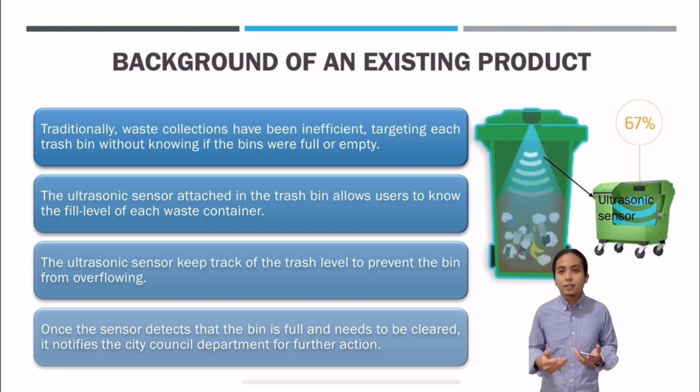First point: traditionally, as we know, collecting trash has been inefficient because we don't know if the trash is full or empty.

Second point is, as you can see from the picture, the ultrasonic sensor attached inside the bin is to allow the user to detect the fill level of the waste container.

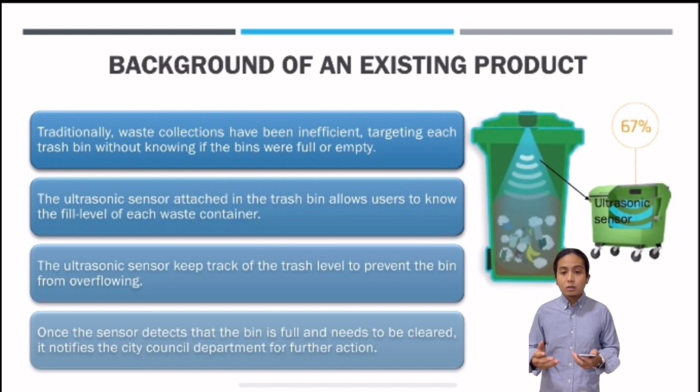Third point is, the ultrasonic sensor is used to keep track of the trash inside the container before it is full or overflowing. The last one is, when the ultrasonic sensor detects if the trash is full or before it's overflowing, it will notify the city council or alert them that the trash needs to be cleared or for further action.

Moving on to the next slide, problem statement of an existing product. Point number one is low quality of the air.

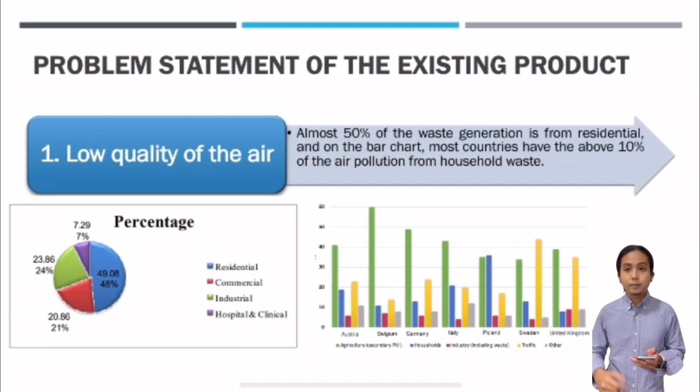Second point for the problem statement is absence of an indicator for hazardous waste. Hazardous household waste, which includes corrosive waste, toxic waste, flammable waste, and reactive waste, are commonly disposed of in the regular trash bin, which harms the community and the environment if left untreated.

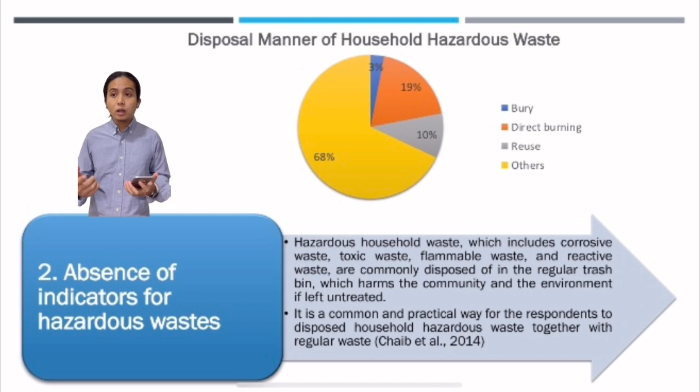It is the norm for people to throw different types of waste inside one container, and it is very dangerous. My name is Ahmad Zahid bin Muhammad Zahid.

The reason why the product needs to be innovated is because the issues of this smart trash bin will impact not only the community but also the country.

The existing smart trash bin needs to be innovated because the low quality of air spread leads to environmental damage, and it can also harm people's health.

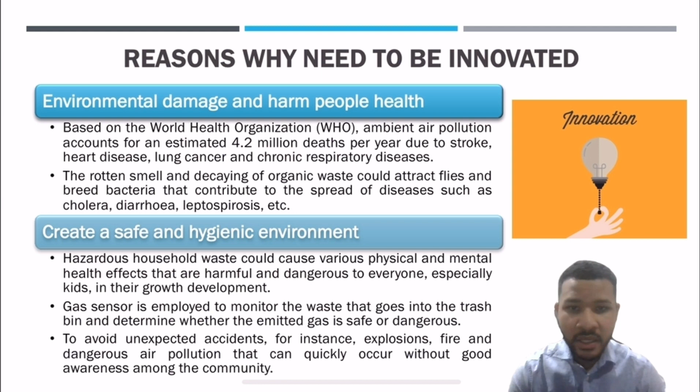Based on the World Health Organization (WHO), ambient air pollution accounts for an estimated 4.2 million deaths per year due to stroke, heart disease, lung cancer, and chronic respiratory disease.

The rotten smell and decaying of organic waste could attract flies and breed bacteria that contribute to the spread of diseases such as cholera, diarrhea, and leptospirosis.

The second reason is to create a safe and hygienic environment in the community, especially for kids ranging from newborn to 12 years old, by monitoring every waste that goes into the waste bin implemented with a gas sensor.

In the long term, hazardous household waste could cause various physical and mental health effects that are harmful and dangerous to everyone, especially kids in their growth development.

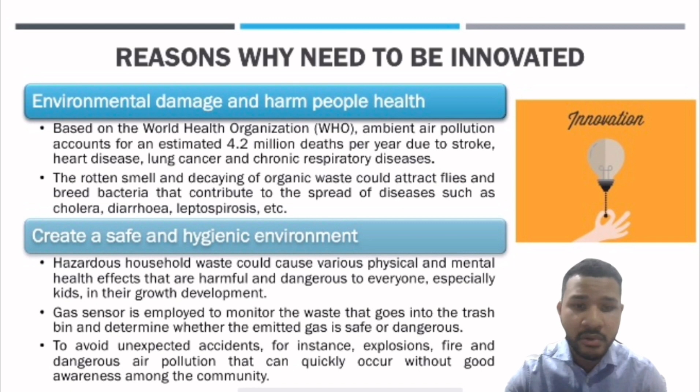On the other hand, the product needs to be innovated to avoid unexpected accidents, for instance explosions, fire, and dangerous air pollution that can quickly occur without good awareness among the community.

My name is Muhammad Shahrizal bin Iskandar. For our project, the type of innovation is modular innovation, which is a slight customization of an existing product.

This is because the existing product does not have much to upgrade. For our project, we add a gas sensor and ultrasonic sensor to improve the existing product.

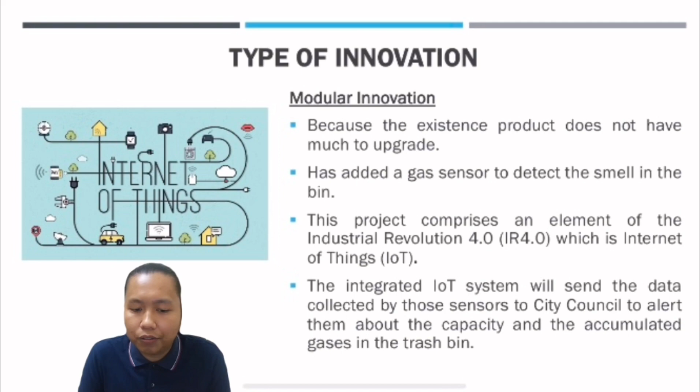Our product implements Industrial Revolution 4.0 elements, which is IoT. The integrated IoT system in the product will send data collected by the sensor to the City Council, alerting them of the operational status of the trash bin. The category of product for our project is improvement.

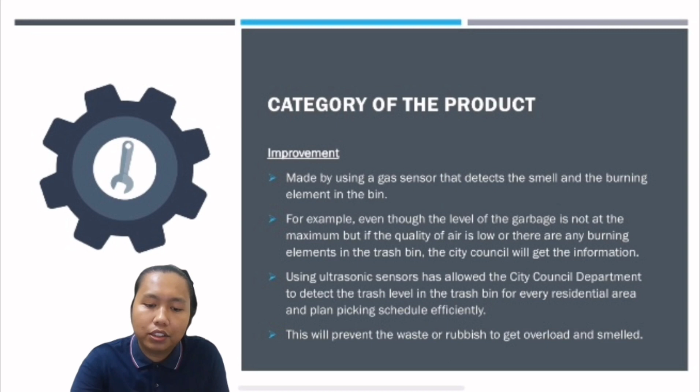Okay, the improvement that we made on the existing product is adding a gas sensor that can detect smell and burning element in the bin, and an ultrasonic sensor that can detect the level of trash in the bin. This collected data can be used to plan a pickup schedule for the trash bin. By adding these two sensors, it will prevent waste or rubbish from being overloaded and smelly.

This is the design for this smart trash bin monitoring system. There are 5 components used for this product: the first is ultrasonic sensor, the second is gas sensor, third is controller box, the fourth is DC motor, and the last is LED indicator.

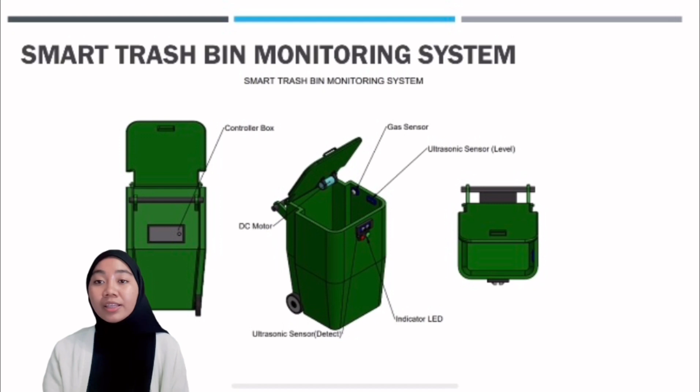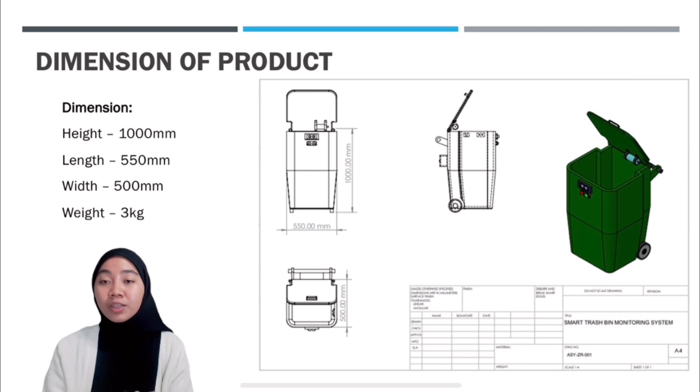These figures show the dimensions of the product. The height of the dustbin is 1000mm, the length is 550mm, the width is 500mm, and the weight of this dustbin is 3kg.

Moving on, I will continue with the aspects of the product. The first aspect is usability. The purpose of our product is to create a hygienic and hazard-free trash bin for users, which can be monitored from the control room of the City Municipal Department for smooth and efficient trash collection scheduling. This product is beneficial for both users and customers.

The next aspect is functionality. The controller in the bin is programmed using Arduino IDE, while the electronic circuit is designed and simulated using Proteus. The data collected by the sensors will be sent to an MQTT broker using Python IDE, and from there the data is received and visualized in Node-RED with the application of a dashboard.

There are a variety of types of data visualization, for example pie chart, table, bar graph, line graph, and many more. All the data from devices and sensors will be stored in a database for future purposes, and in this case we employ a software called DBeaver.

The next aspect is originality. We've added 2 new features, which are the gas sensor and motor. The gas sensor is used to monitor air quality and also detect hazardous gases, while the motor is used to automatically open the lid when the ultrasonic sensor detects the presence of people.

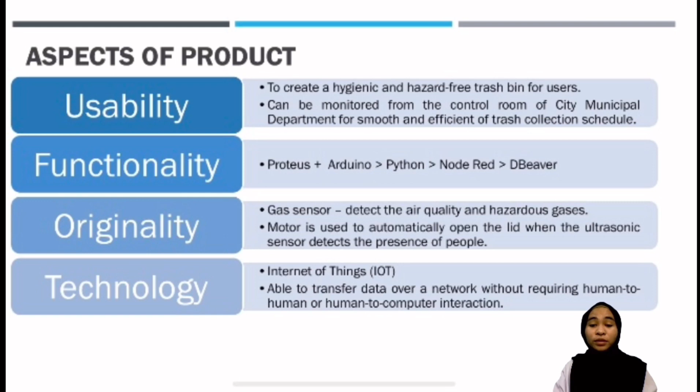And the last aspect is technology. We have employed one of the Industrial Revolution 4.0 pillars, which is the Internet of Things, called IoT. This enables us to transfer data to a network without requiring human-to-human or human-to-computer interaction.

Moving on to the dashboard. For the dashboard, we use 3 different types of data visualization: table, gauge, and also line graph. The staff of the City Municipal Department can easily monitor the level of trash in the bin, and also monitor any abnormalities in the gas level for detection of hazardous gases and air quality.

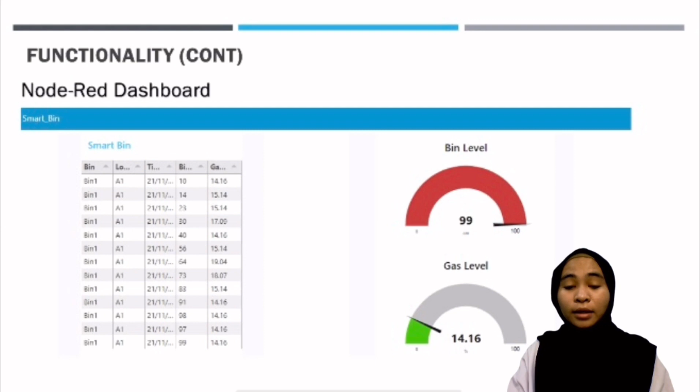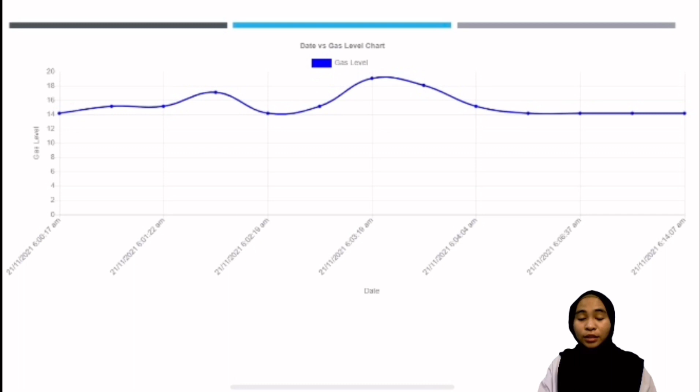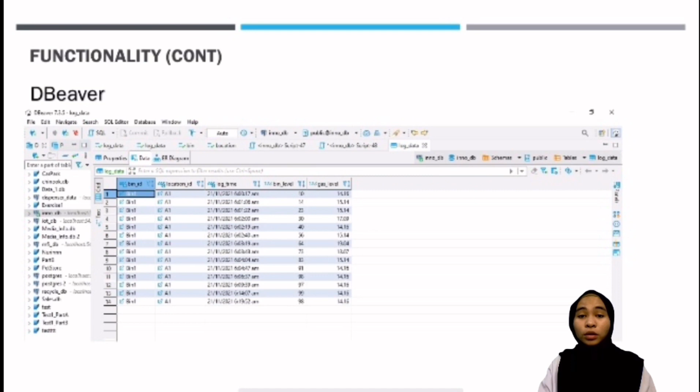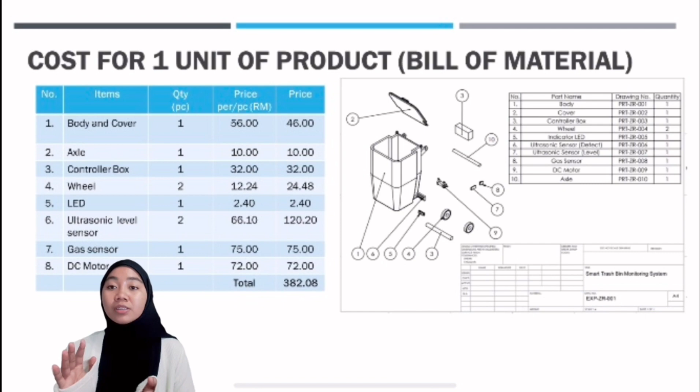The total cost for one smart trash bin is RM 382 and 8 cents. All the materials used in this smart trash bin are shown in the table below. So this is the video for simulation of the model.

My name is Mohammed Haris bin Ahmad Radim. Today I will explain to you about the target market for our company. This is industry under City Council in Malaysia.

Starting with Melaka. The company size is large because the City Council will cover all the areas where they apply the smart trash bin. The location is in Melaka. For operating characteristics, the technology scope, our company implements IR 4.0 with Internet of Things (IoT), where the data collected from the trash bin will be sent to the host computer or person in charge in real time.

And centralized monitoring using data visualization techniques such as pivot table, line graph, etc. Next, the benefits of the product.

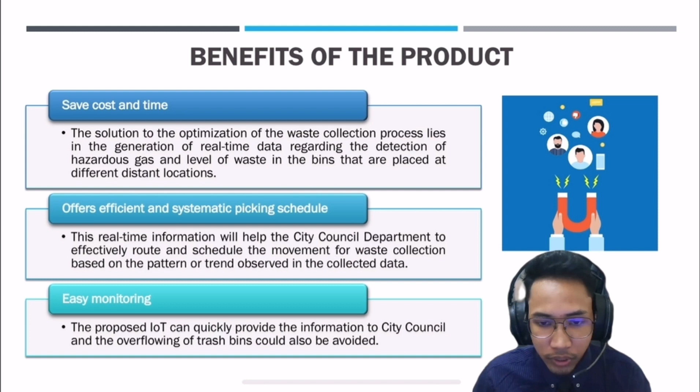First, save cost and time to optimize the waste collection process in real time generation. Second, offer an efficient and systematic picking schedule. With real-time information, this will help the City Council department to effectively route and schedule the movement for waste collection based on collected data.

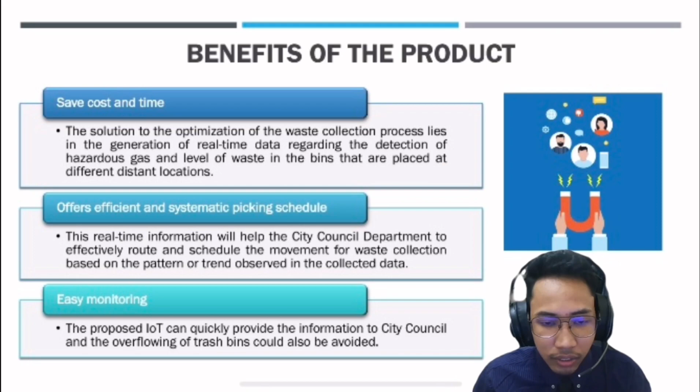Lastly, easy monitoring. IoT will provide information to the City Council quickly and accurately. With these benefits, overflowing trash could also be avoided and the city will stay clean and clear. That's all for our presentation. Thank you.